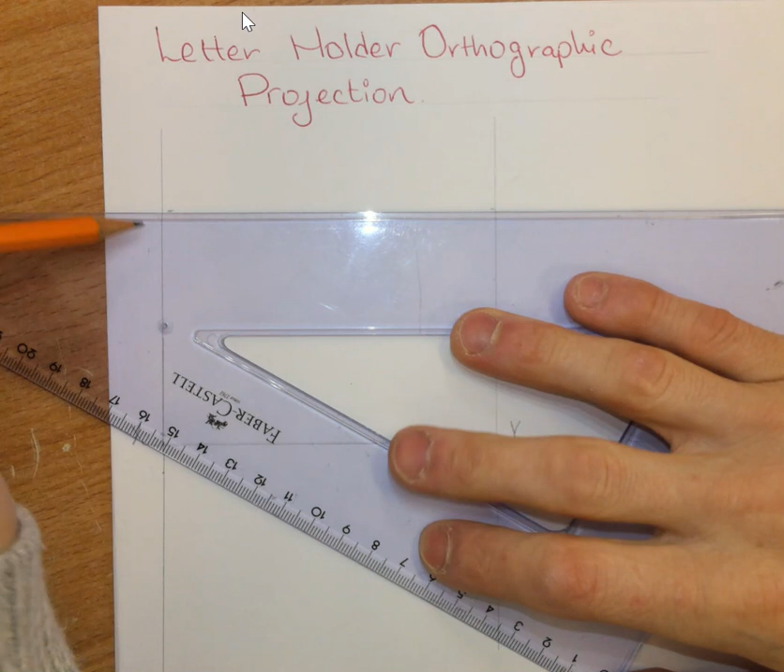Once I've that done, my next step is I'm going to measure up a distance of 70 millimeters. So I'm going to measure from here up to here, 70. And I do the same on the other side. Measure up from 10 to 17. So that's 70 millimeters, and I'm going to draw a horizontal line. While I draw this horizontal line, I'm going to extend it to the right hand side. That will help me to find the height of my end view.

So my next step now is I'm going to draw my plan. So my plan, I'm coming down a distance of 15 millimeters. So from my baseline, which is here, my XY line, I'm coming down 15 millimeters. So this is 10. Okay, so I'm coming down to 9, and then I'm coming down to 5. So in total we have 15. So that's 85, from 100 to 85. I can do the exact same on the left hand side. Put my XY in line with 10, and then measure down to 8.5, which is 85, and I can draw my horizontal line here.

So once I've that done, I'm now going to measure down a distance, which is the width of my view. So my letter holder is going to have an overall width of 45 millimeters. Just going to measure 45, and I'm going to do the exact same thing on the other side. So I'm going to get my ruler, put 0 here, and I'm going to measure down 45. So make sure your 0 is lining up with this line, with 45 there. Join up the 2 points, like that. So this is the outline for my elevation. This is the outline for my plan view.

My next step now is I'm going to draw my end view. So in order to find that outline, if we came down 15 from here to here, we now need to come over 15 from here to here. So this is where my view starts. And then I measure out 15 again from here. And I draw my line nice and lightly, up and down. And I'm now just going to join this line from here to here, and that is my 45-degree line.

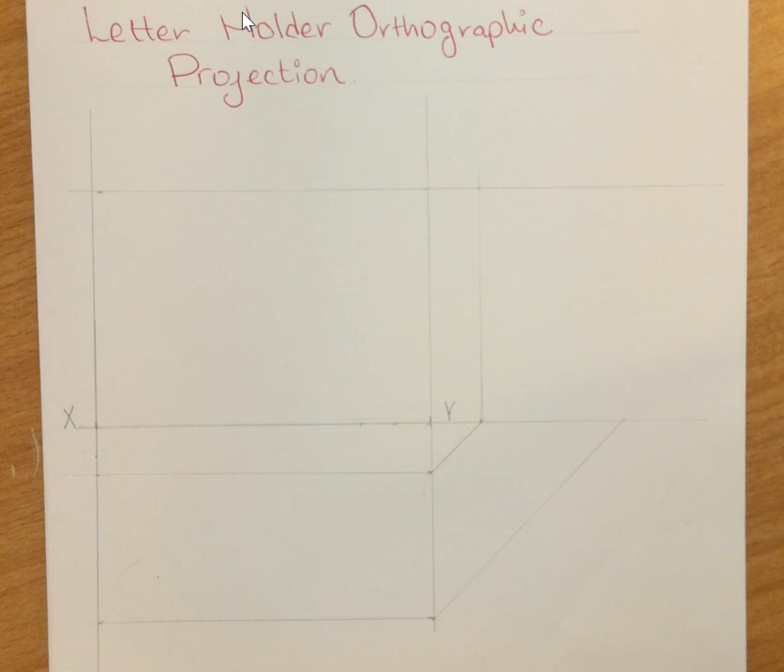My next step is I'm now just going to take my line straight up, so a vertical line. Like that. So that's the outline of my end view.

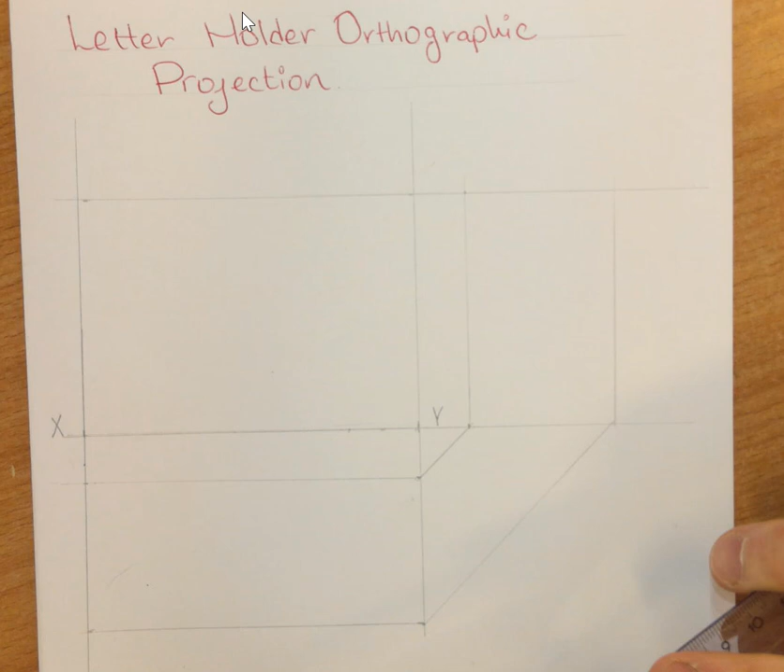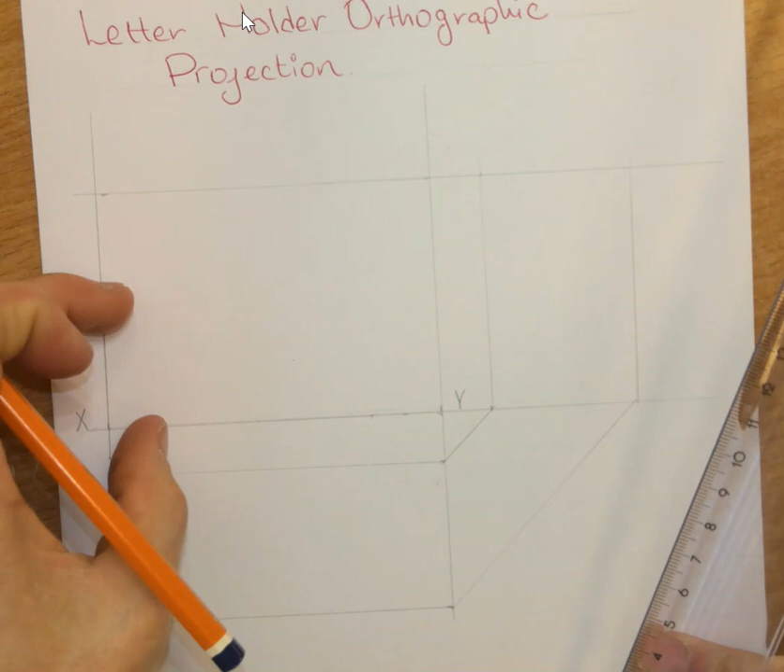So let's start drawing our elevation now. So in order to hold our letters, we're going to have a front piece and we're going to have a back piece. The back piece is going to be curved, the front piece is going to be straight. So the front piece is lower down, so we're just going to, with our rulers, put 0 on the baseline, which is our XY line, and we're now just going to measure up a distance of 30 millimeters.

So we're going to mark it off here, and we're now just going to put 10 here, and I'm going to measure up 30, so that's 100 millimeters, that's 130, and now we can join those 2 points like that.

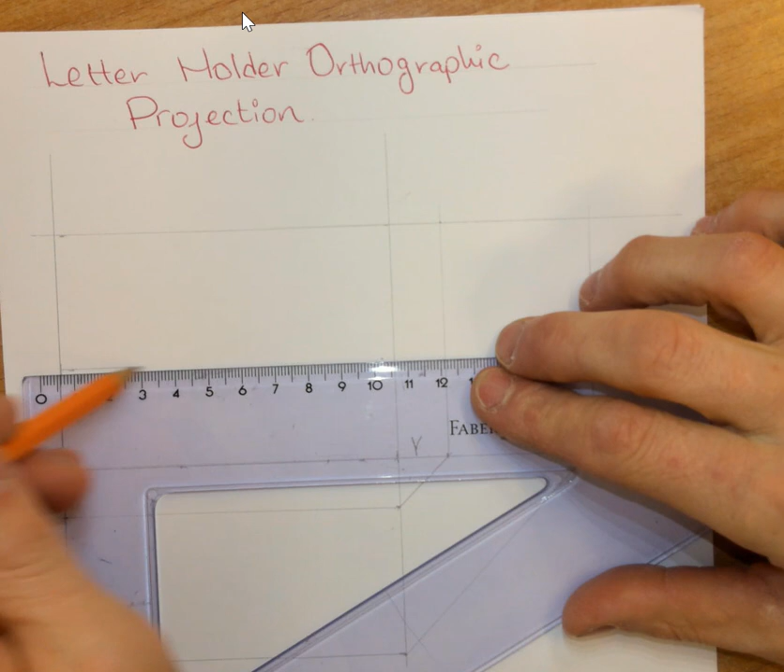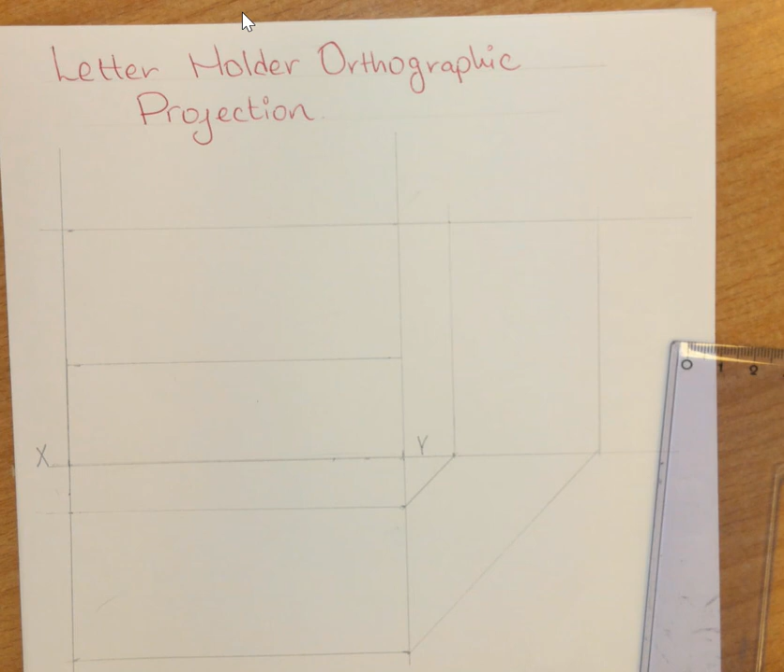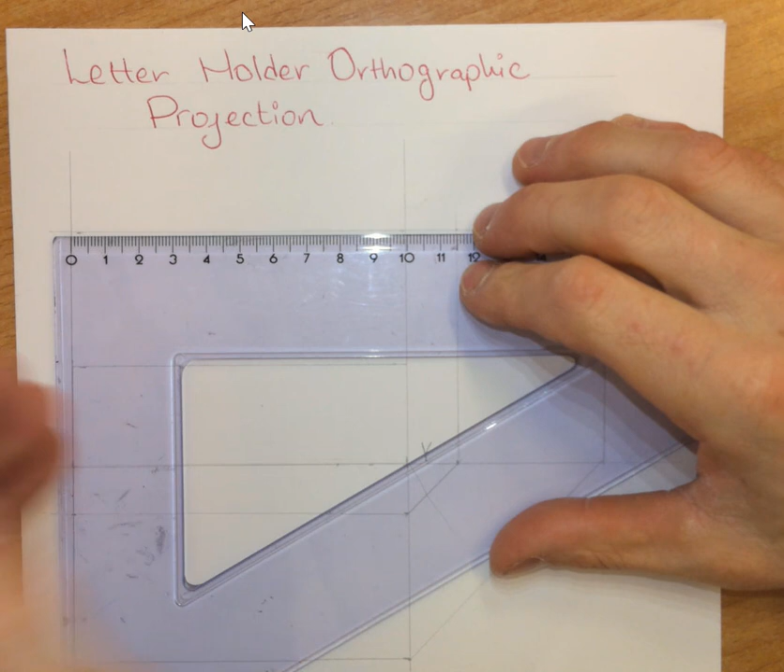Now for the back piece, that's going to be curved. So in order to achieve a curve, the first thing we'll do is we'll find halfway. So the distance from here to here is 100 millimeters, half 100 is 50, so we're just going to mark off 50, which is there.

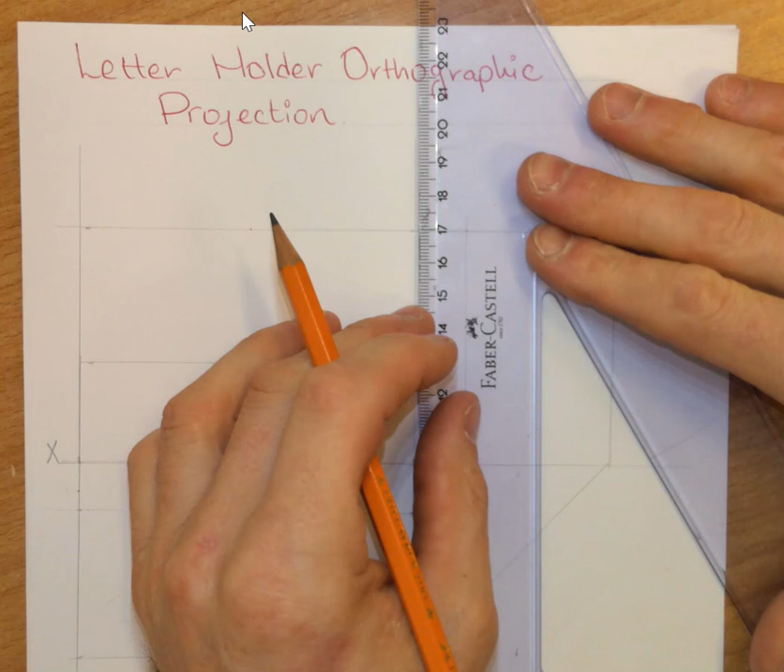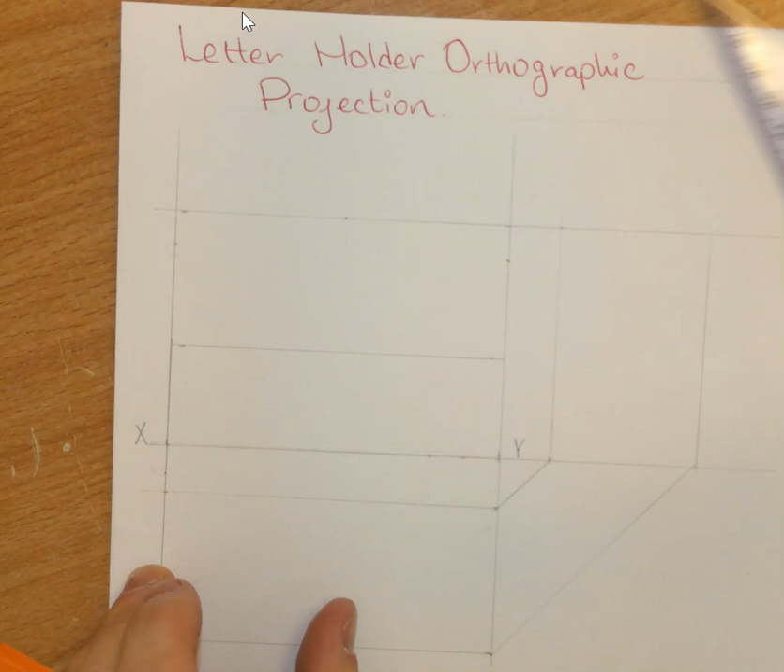My next step now is I'm going to measure down a distance of 10 millimeters on the right, which is there. So I'm just coming down 10 millimeters like that, from this corner down. And I'm now going to measure 10 millimeters down on the left hand side. So now I've marked out my 3 points. My next step is to draw a freehand curve.

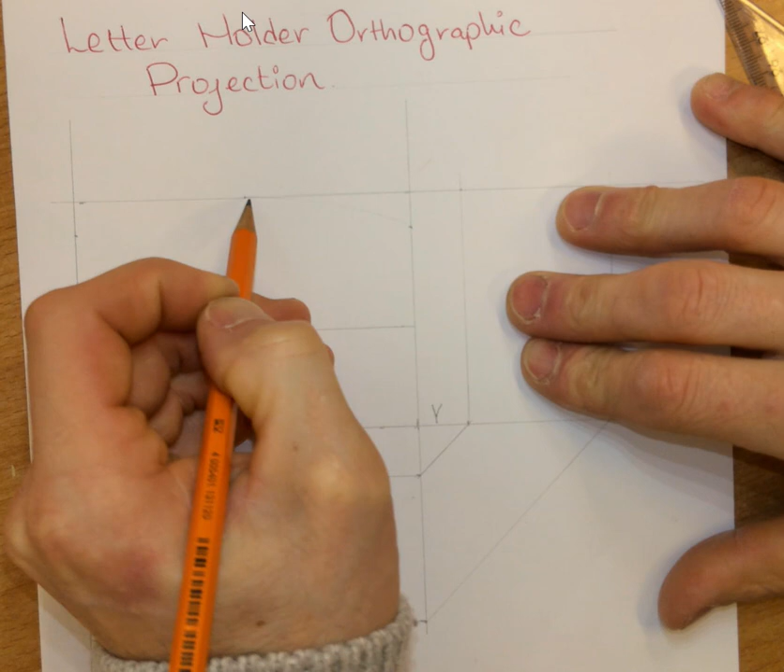And in order to draw my freehand curve, we're going to start at the very middle and we're going to go to the right. So practice it 2 or 3 times before you actually drop your pencil. Drop your pencil nice and lightly, and then we'll go over it heavy. Okay, so that's the right hand curve.

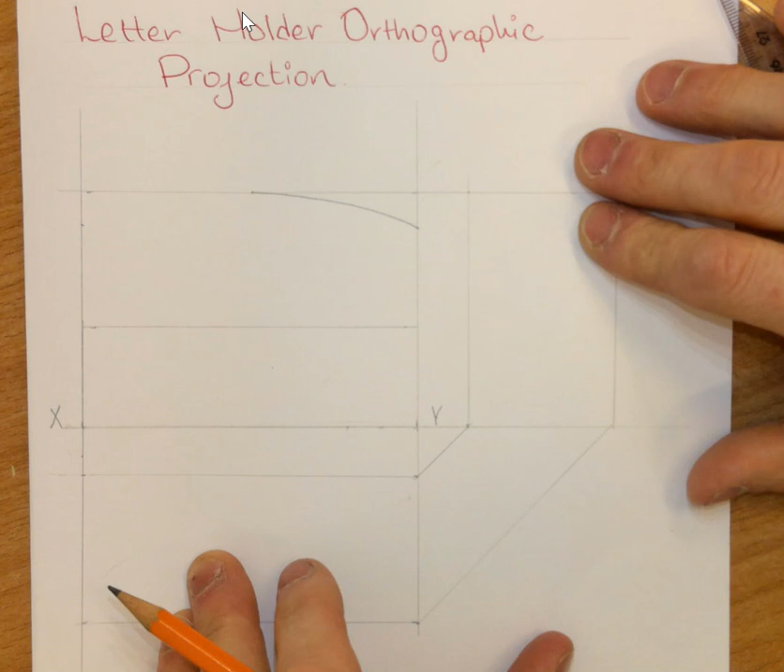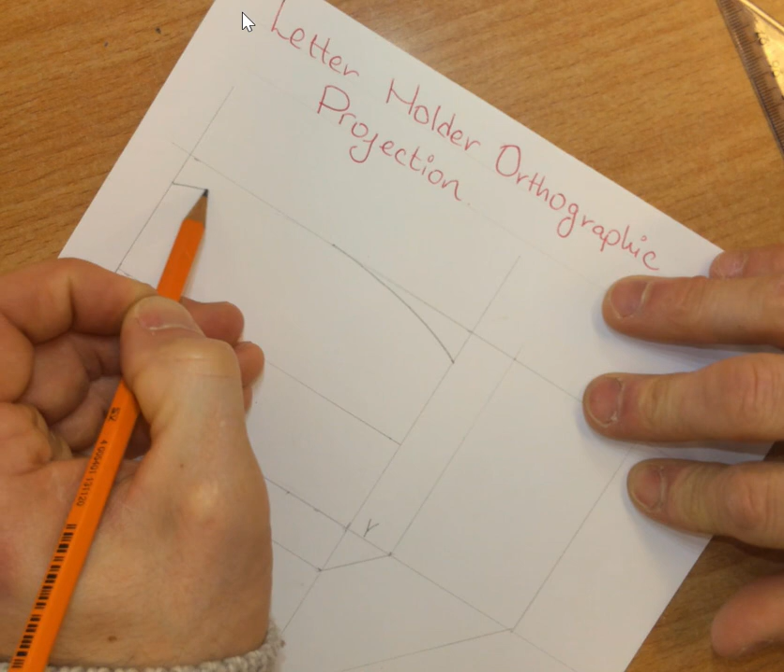Now once I've that done, I'm going to twist my page just to make it easier for myself. So twist your page nicely like that. Again, practice drawing your curve before you draw it. Make sure it's the same as the other one. And drop your pencil nice and lightly. Then we'll draw it heavy. Okay. So that's my freehand curve completed.

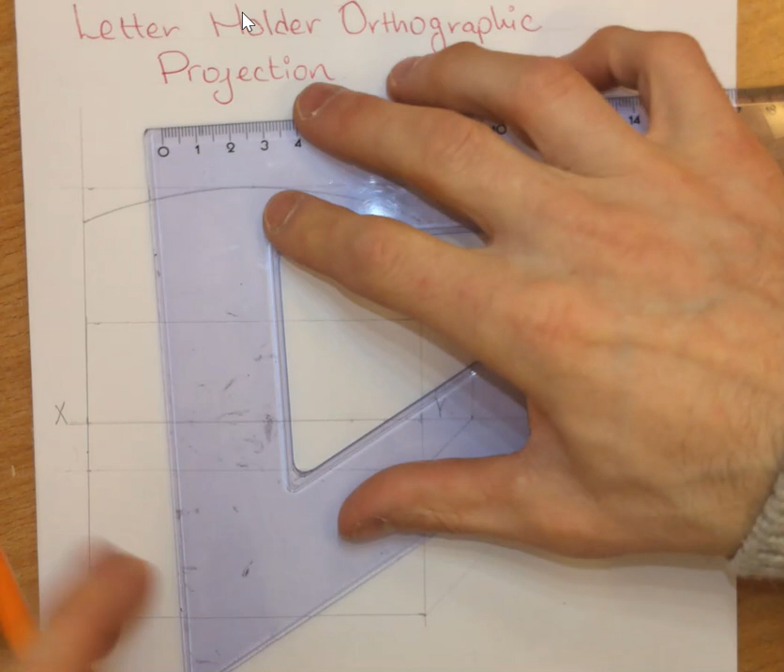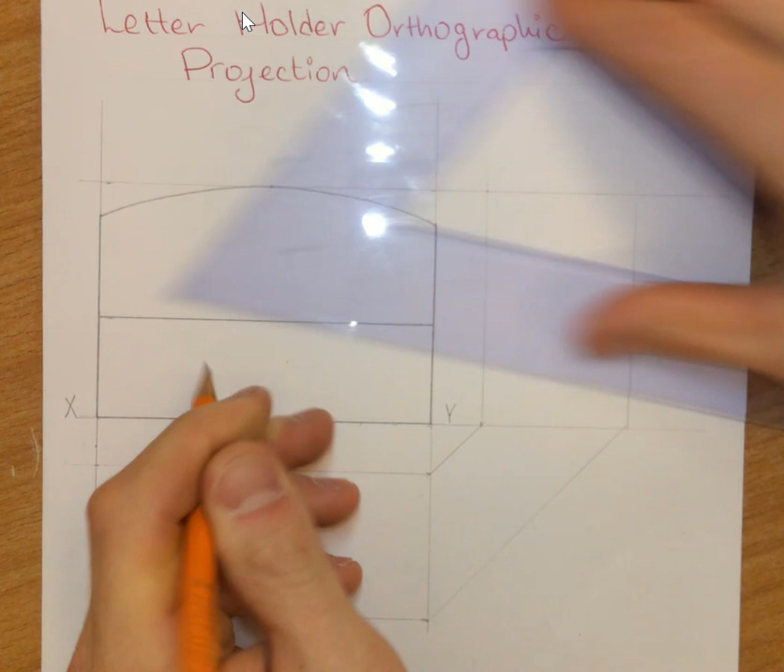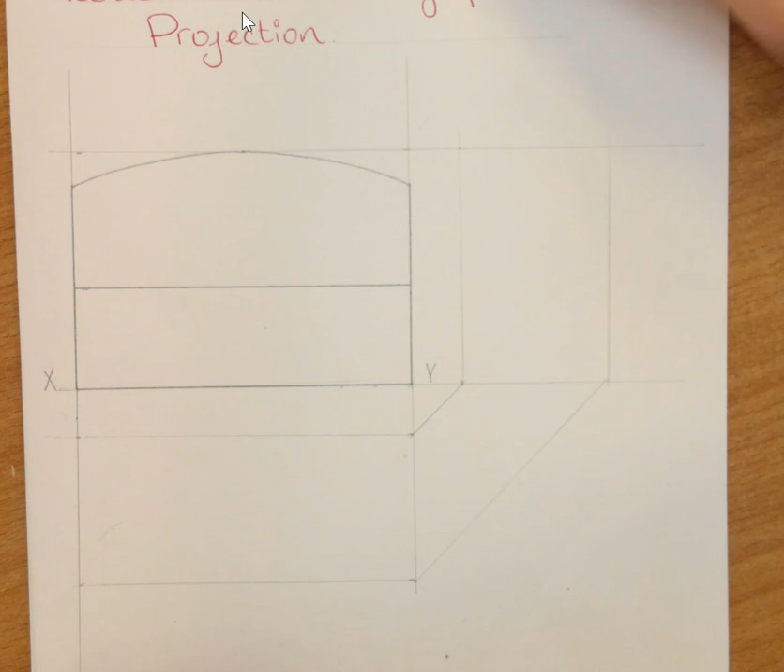Now what we can do is we can go around all our edges heavy, just with a ruler. And again, we're pressing our pencil down just that bit harder. That's my elevation completed. My next step now is to move on to my plan view. Okay, so we're now going to focus on the plan, and I'm going to zoom in on the plan view here now so we can just look at it a bit closer.

Okay, so for my plan view, we're going to go with the thickness of the material on the front and the back. And that thickness we're going to go with, just so it looks in proportion, let's go with 7 millimeters. So from here to here is 5, 6, 7. Okay, so jump 5 and then 2 small little steps after that.

So that's 7 mil at the back. Let's do 7 mil at the front. So 7 millimeters is from 60 up to 65, 66, 67. Make sure your pencil is nice and sharp so that you can actually locate that point. So we have 2 points marked on the right. Let's do the exact same thing on the left.

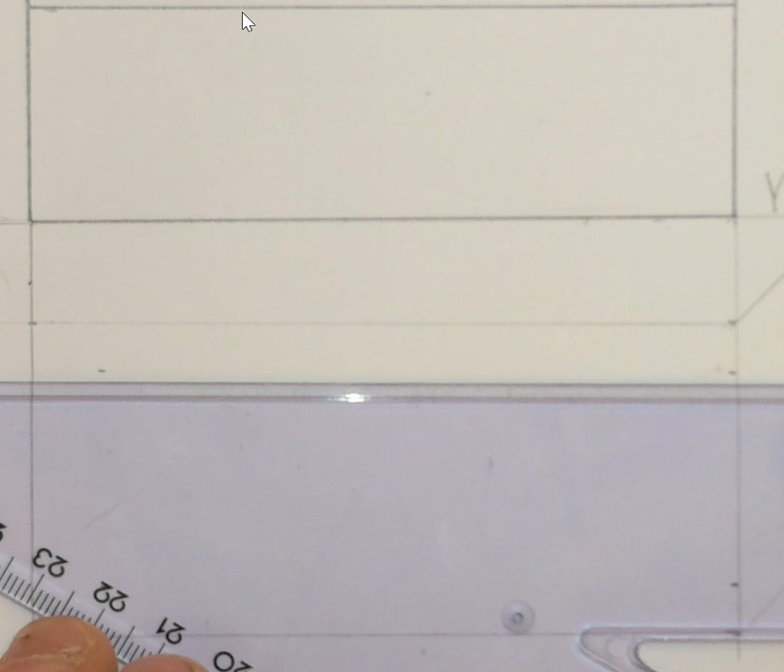So now what I have is 4 points or 4 markings on my plan. Let's now join them up. So draw that line nice and heavy, and we'll do the same at the front. And we can now make this line heavy and the back line heavy.

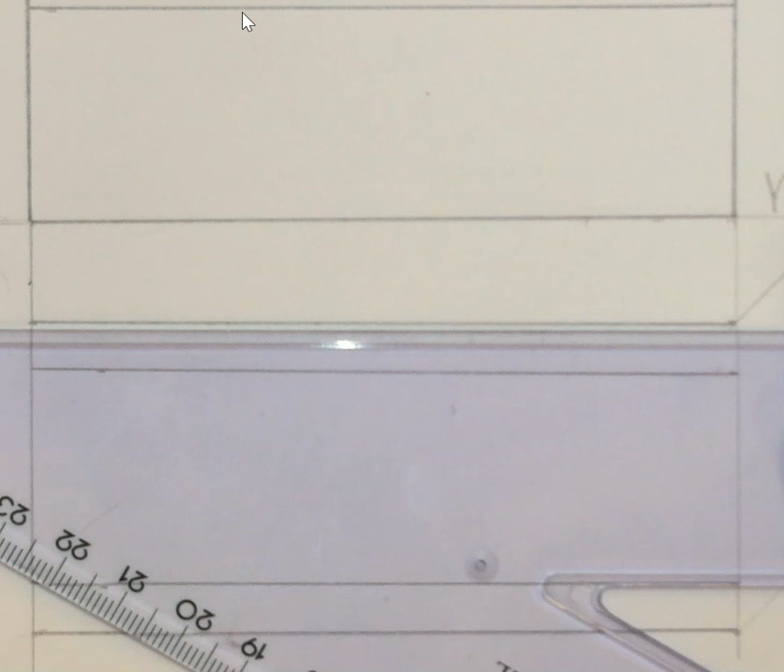So when I look down from the top, that's my front piece and my back piece completed. The 2 pieces will be made of the exact same type of material, so that's why they look the exact same width.

So what we're going to do now is focus on our joints. We have our side material here, where our joints are going to be completed. So in total, let's measure in a distance of 10 millimeters. Okay, 10 millimeters. So from 1 back to 0, we'll just mark that, and again on the other side we'll start at 0 and come over to 1, which is 1 centimeter, the exact same as 10 millimeters.

So once I've that done, I'm now going to draw a vertical line, which is here. So you can see there I'm slightly adjusting it left and right just to get it completely vertical. I'm lining up with this one. Take your time to draw it, and when you're happy, proceed. So that's my vertical line.

Okay, again here, when I put my ruler here, it's quite hard to see if it's vertical or not, so I might just move my ruler and put it around the other side like this. That way I can eye up this line on the right. So put your ruler on your marking. Take your time before you draw it. When you're happy, draw your line.

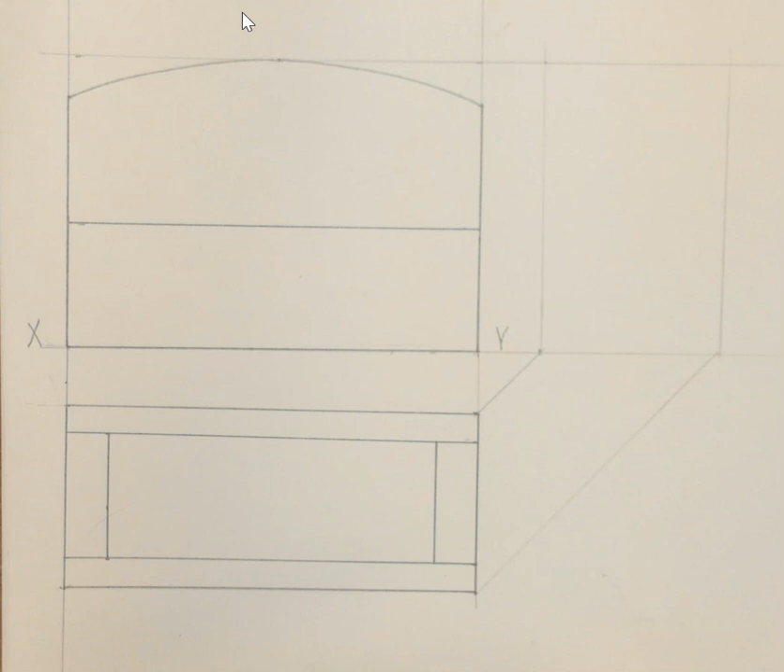So what I'm now going to do is try and bring up the width of my front piece here and my back piece up to my end view. In order to do that, again, I'm just going to use my 45-degree lines. So put my ruler like this at this point, which is here. Try and get the edge of my ruler parallel to this line. Take your time, don't rush it, get it parallel, and draw that lightly up to my end view. So that's that line completed, and we're going to do the exact same for here.

So again, I'm going to get my ruler and put it on this side of the line, just so I can see this line. So line it up here, and draw your line. Take your time, make sure they're parallel. Okay, use your eye.

And now I'm going to focus in on my end view. So I brought up the thickness of the back piece and the thickness of the front piece by these 2 lines. So we'll zoom in on our end view. Just looking at my end view, what I'm now going to do is take up my back piece and my front piece with two vertical lines.

So I'm going to put my pencil here. Take your time when you're drawing this line and extend your line up nice and lightly. Put my pencil here, extend our line up. When we extend our line up, just take it nice and slow, get your line vertical. Here we go.

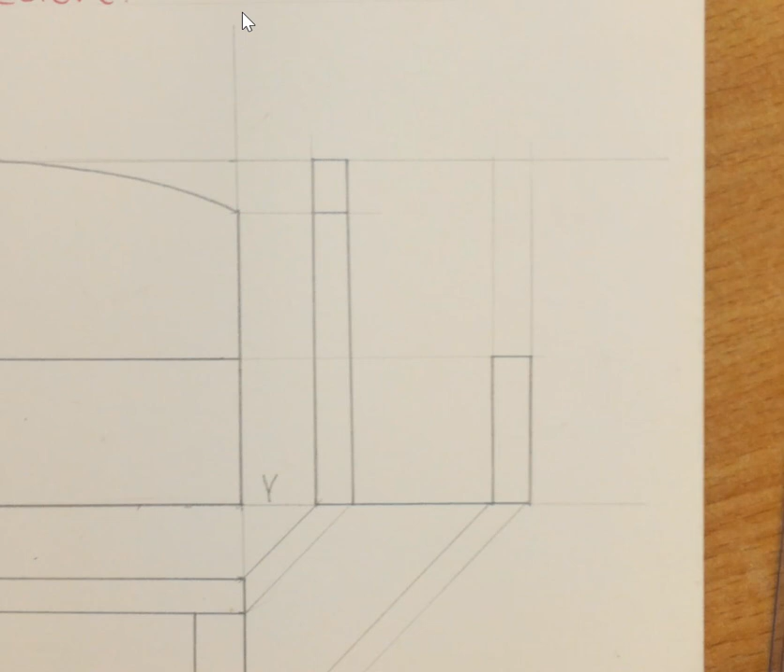Once I have that completed, my next step is to put my ruler at this point, which is here on my elevation, because that marks where the curve ends. And I'm now going to extend a line from here straight across nice and lightly, and we can make that line heavy. This line heavy, and then this line, and the top. So that's my front piece and my back piece.

My next step now is to now put in my wood where my joints are going to be. So in doing that, we're just going to measure down a distance of 10 millimeters from here to here, like that. Just mark out a small little tick, and I'll zoom in.

So measure down 10, so 180 down to 170. Or even 130 down to 120. That's 10 millimeters, and we're going to join it from here to here like that.

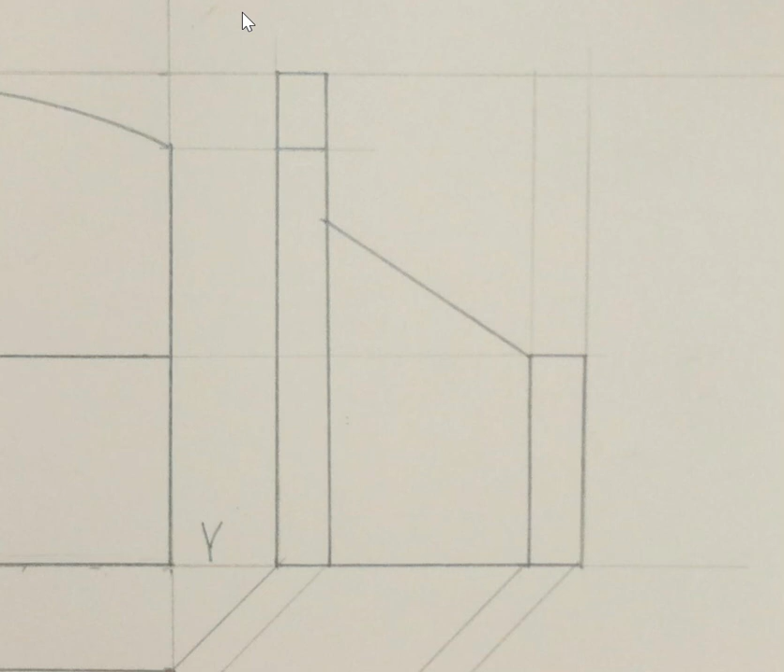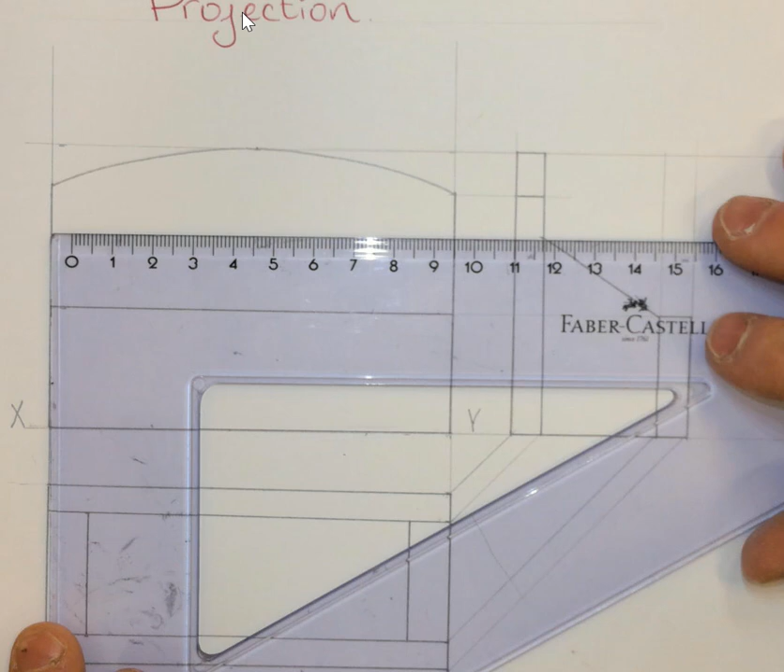Once I've that done, I'm now going to take this point from here straight across to my elevation. So we get our ruler. We place it down, line it up with this point, which is here. Take your time in drawing this line. In order to help you to draw this line, what you could do is you could line the left hand side of the ruler, which is your vertical edge, up with your vertical lines that you've just drawn, while also matching up with this point.

So I don't need any T-square here, I'm just using one set square, and I'm using the 90-degree edges on the set square. So very simply, catch your pencil, pull that line straight across nice and lightly. We can stop it, and we can extend our ruler and continue. So that line is very important, that light line that I just drew.

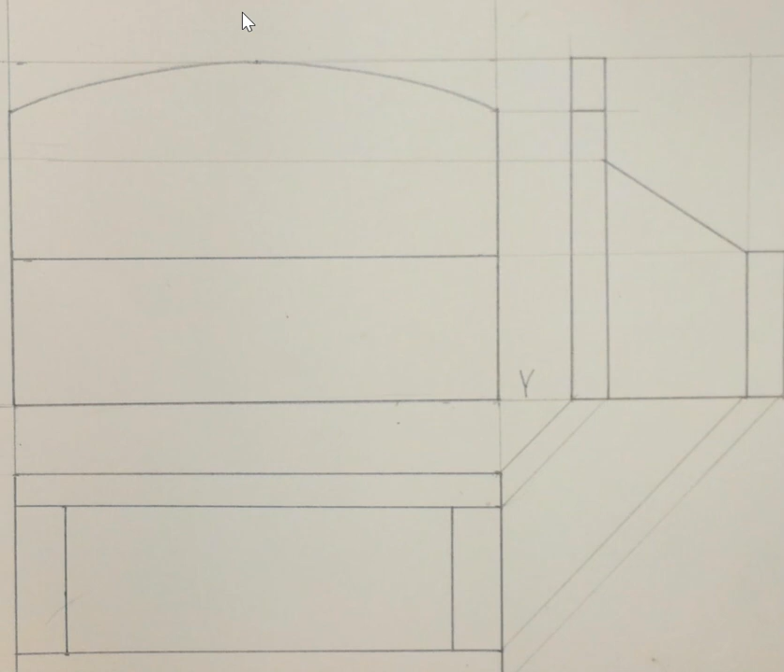So the reason why we drew this line across is to find the height of our two side pieces, which are going to be here and here. And I'm now going to find those by extending this line, which I have here, straight up. Now we do know that this distance is 10 millimeters, so we can, if we want, come over a distance of 10, like this, mark it on that line, and join that point up to this line, and this now will be a heavy line from here to here.

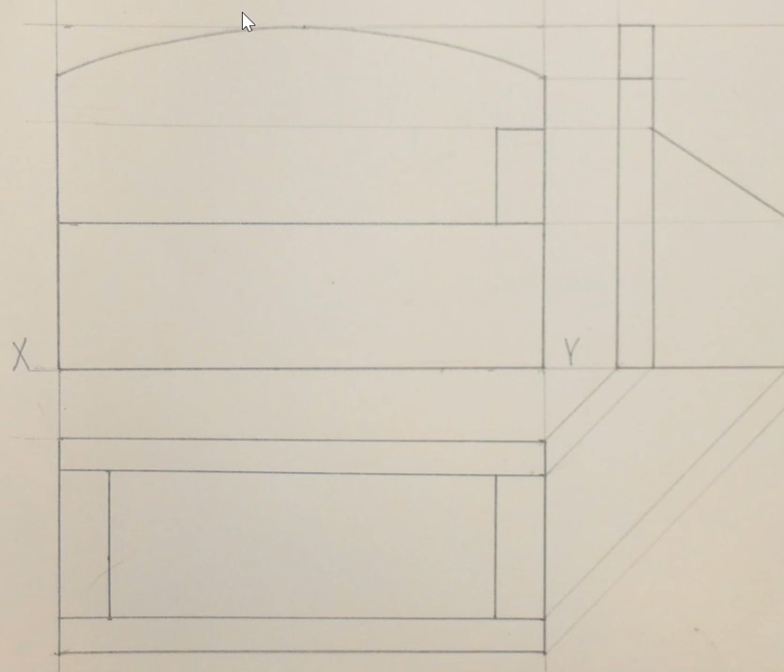We can draw this line heavy also, like that. So once we've done that on the right, let's do that on the left. So we now put our 0 here, and we mark 10 millimeters, and we then join this line up with this point, like that.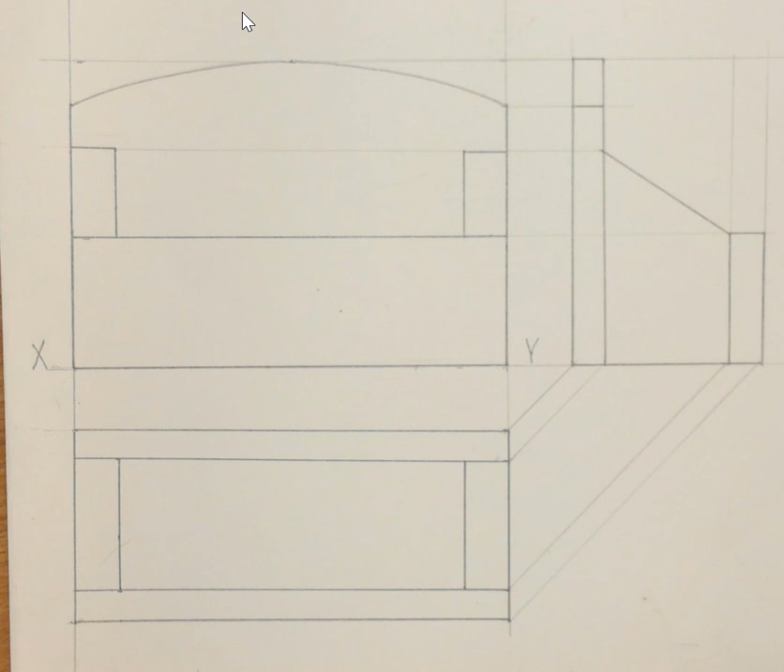So my next step is to now draw the bottom piece of wood, and this will be seen on my end view. So I'm going to come up a distance of 10 millimeters, which is here, like that. So we're going to go from 160 to 170. Okay, I'll zoom in on that for you.

So again, up 10 millimeters, and I'm now going to draw a horizontal line. So put your ruler like that. Eye up your baseline. Make sure your ruler is straight with it, and draw your line.

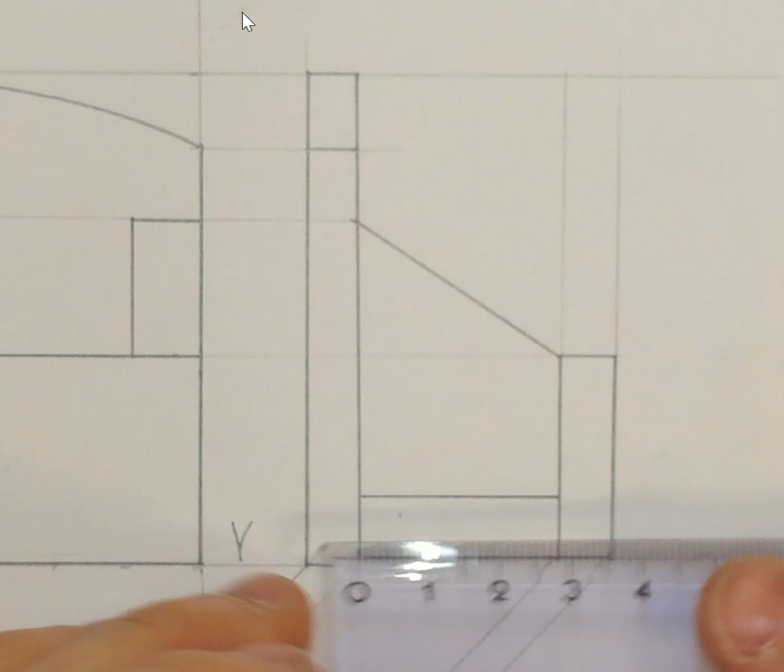So now what we're going to do is we're now going to put in our joint. So the joint that we're going to use here is a finger joint. So what we're going to do here, very simply, is we're simply just going to find the middle of the joint. So this is roughly what, 20 should be kind of 30 wide. So just mark 15, which is here, like that. That's the halfway. Put a dot just on that point.

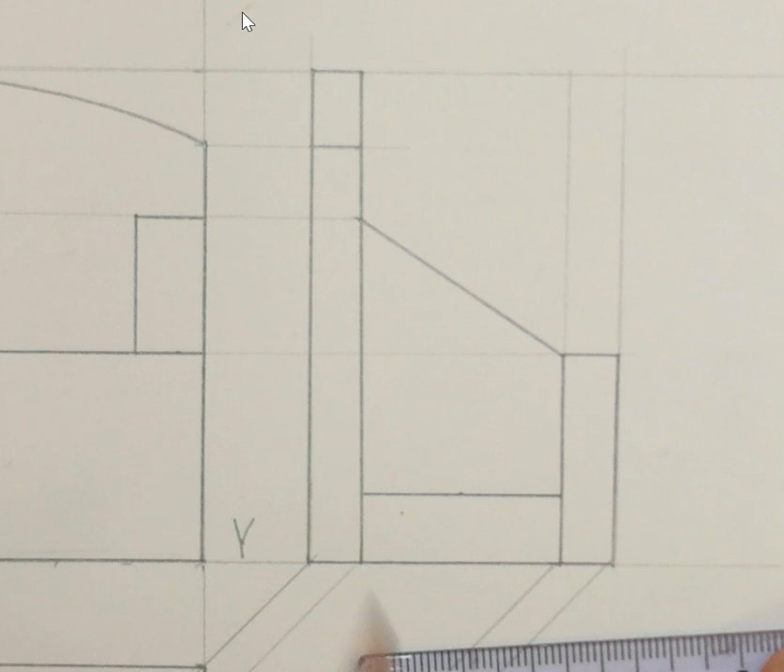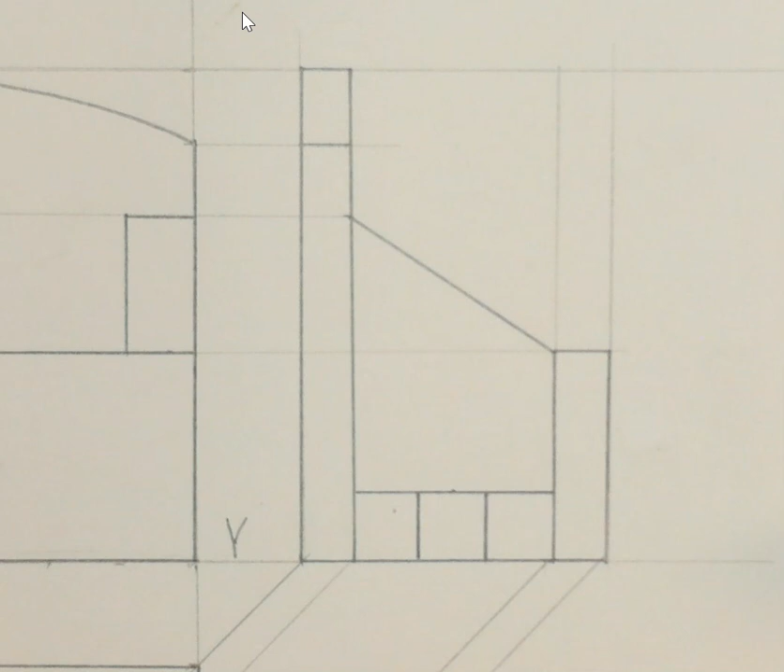And we're now going to measure 5 to the left and 5 to the right, like that. Once we've that done, we're going to draw a vertical line straight down, like that. That's heavy, and then this line is heavy. So I made a mistake when I was drawing this line across. I should have drawn it lightly. The reason why I should have drawn it lightly is because I need to now rub this out, but that's okay. That looks fine there. Okay.

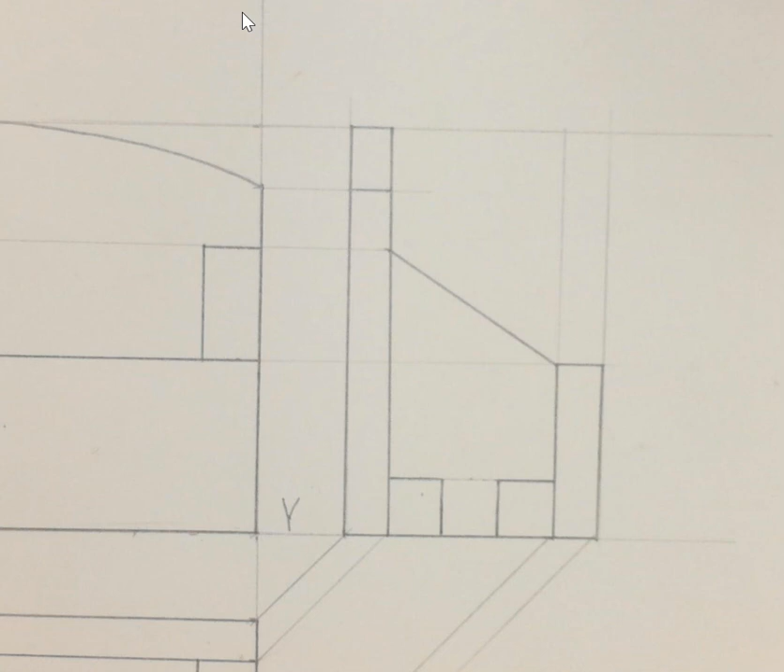So whenever we're drawing an orthographic drawing, you also need to include hidden detail. And the hidden detail reveals any components that you can't see when you're looking at the elevation, or even when you're looking at the plan.

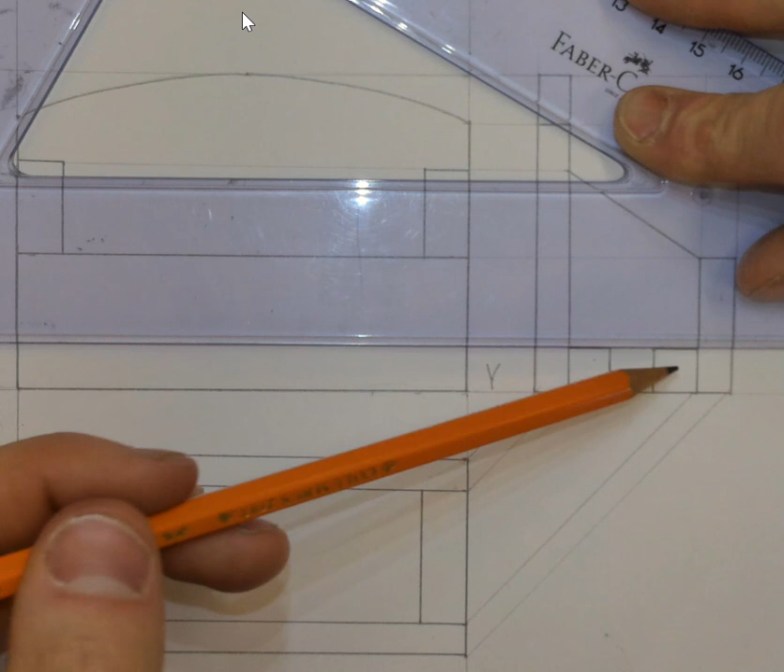So in order to draw the base piece of this letter holder, we're simply just going to extend this line across like this. Now I'm going to put the ruler on top because it allows me to see this line. It's closer to the edge and allows me to get a better viewing and a more accurate line. So we're now going to draw this line, but when we're drawing this line, it's very important to draw it lightly. So I'm barely pressing my pencil. You can see the way I'm holding my pencil from the back. That's a nice light line.

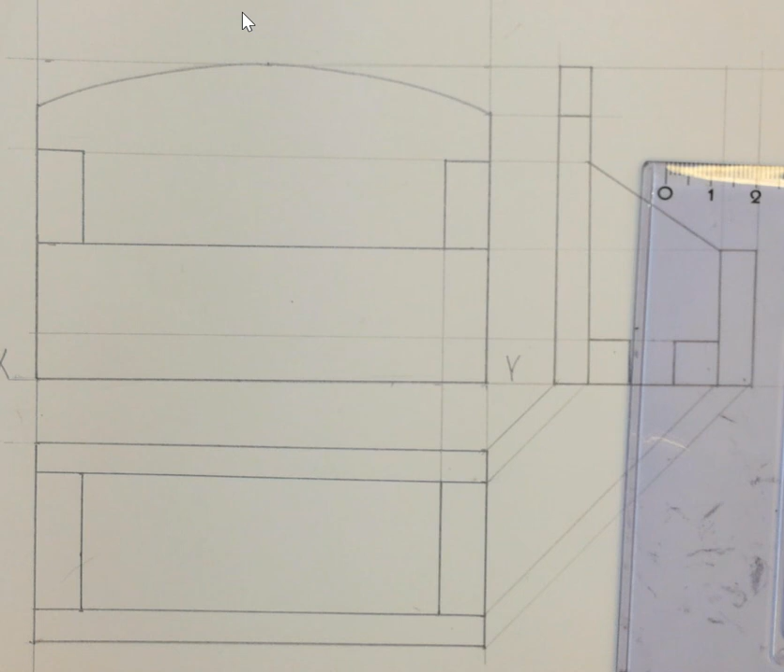Our next step now, what we need to do is we now need to connect our plan and our elevation, like I'm just after doing here. And we're going to draw a light line going down like that. And the exact same over on the left hand side. Okay, so nice and slowly. Line this point up with this point up here, and there's your light lines. When we draw those lines, they will help us to find our hidden detail lines. So we can now draw a broken line from here to here.

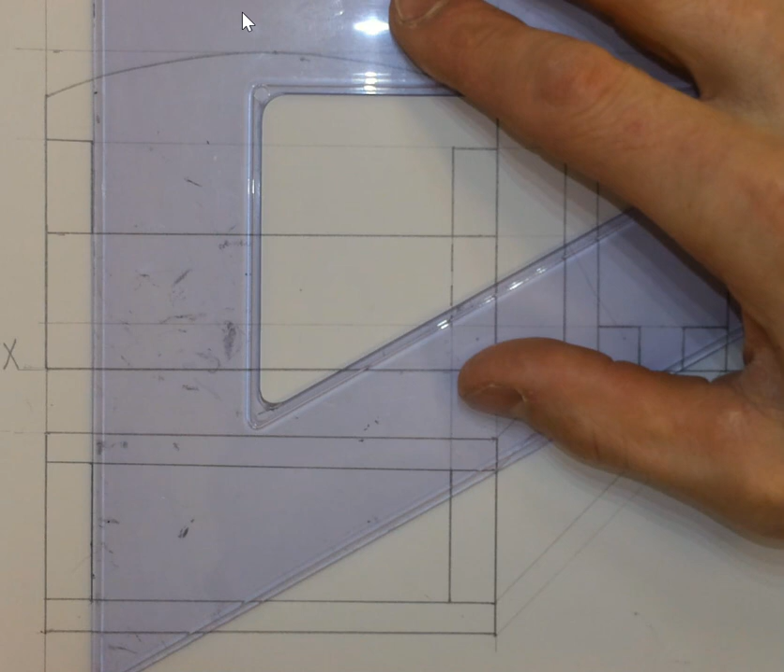Like that. So that's showing the inside pieces, which will go all the way down and all the way down. And now what we'll do is we'll draw our line across. Again, broken. Like that.

Our next step now, we're nearly finished this drawing, is we want to show our joints. So we can see our finger joint here, no problem, but we need to also see it in plan. So in order to see it in plan, we're going to bring this point down the way instead, and this point also down. Okay, so we're going to get our ruler, draw a parallel line

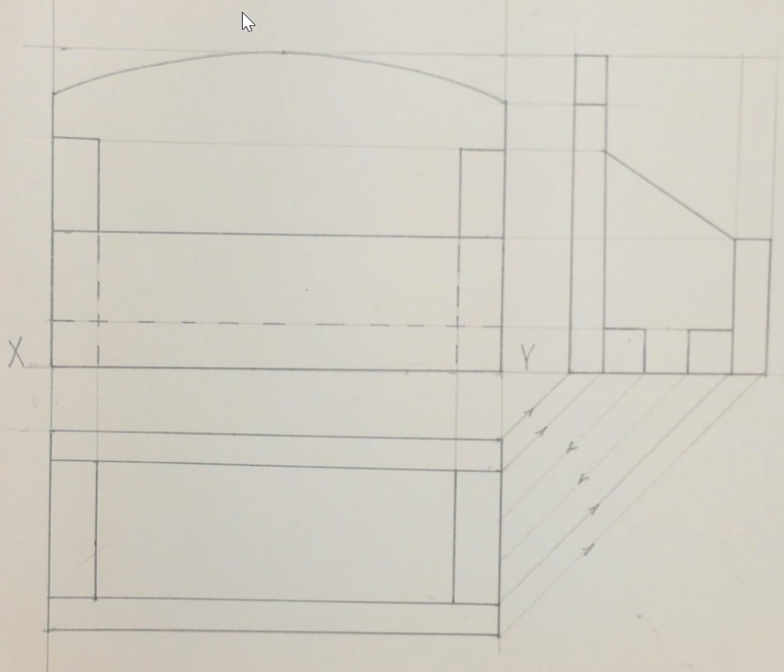down like this, and again from this point draw a parallel line down like this, so we're bringing those two lines back. Just going to do a tiny little arrow there, tiny little arrow up here, and once we've that done, I'm now going to zoom in on my plan view.

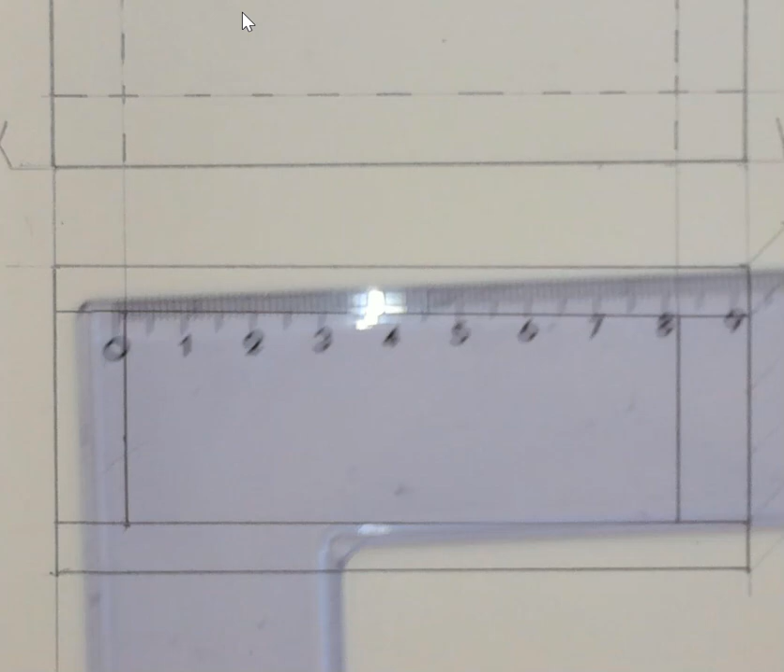So I'm now going to take this line straight across all the way, and this line straight across all the way, and by doing that it will help me to locate the hidden detail in plan for my finger joint. So again, I'm just lining up the left hand of the ruler, that right angle, that 90-degree angle with that vertical line, while also lining up with this line, and I'm going to draw my line across nice and lightly. I'm going to bring my line down, do the same thing again.

Take that across, and we can extend those lines. So those lines that are drawn over lightly, we can now draw a broken line here, a broken line here, and the exact same on the left hand side.

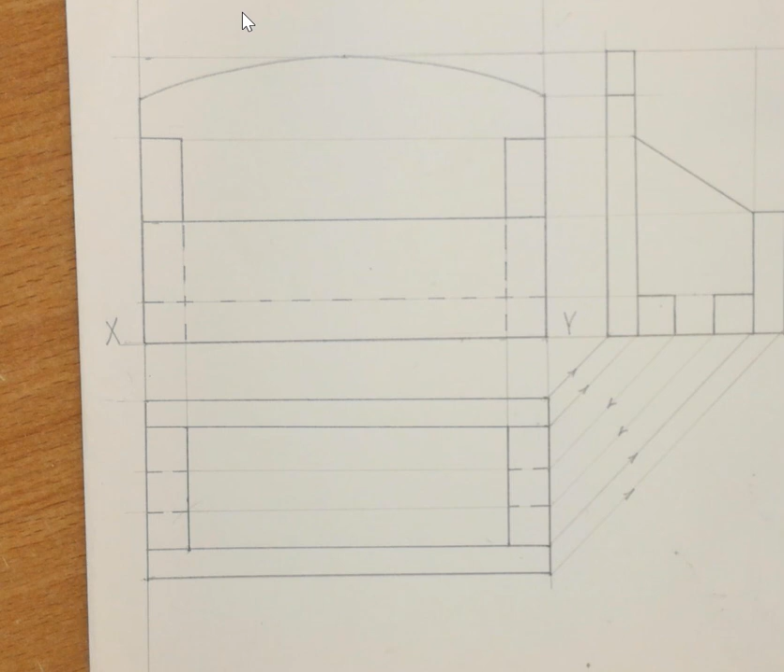Our last step is to now label our views, and that's this drawing completed. So in order to do that, if I zoom in here, at the start we came down 15 millimeters, and the reason why we came down 15 millimeters is because that will give us three 5s. So if I just get my ruler and I put it here, on the left hand side, I've got 5, 5 and 5. So just going to mark 2 little ticks there, one 5, our second 5, and our remaining 5.

Our next step is we're now going to do the exact same thing on the right hand side. Come over, up 5, small little tick, and again up 5, like that. So I'm now going to get my ruler, zoom out first, join up those 2 points, this point and this point, and I'm going to draw a line very, very lightly. So hold the back of your pencil, and we're just going to draw that line lightly.

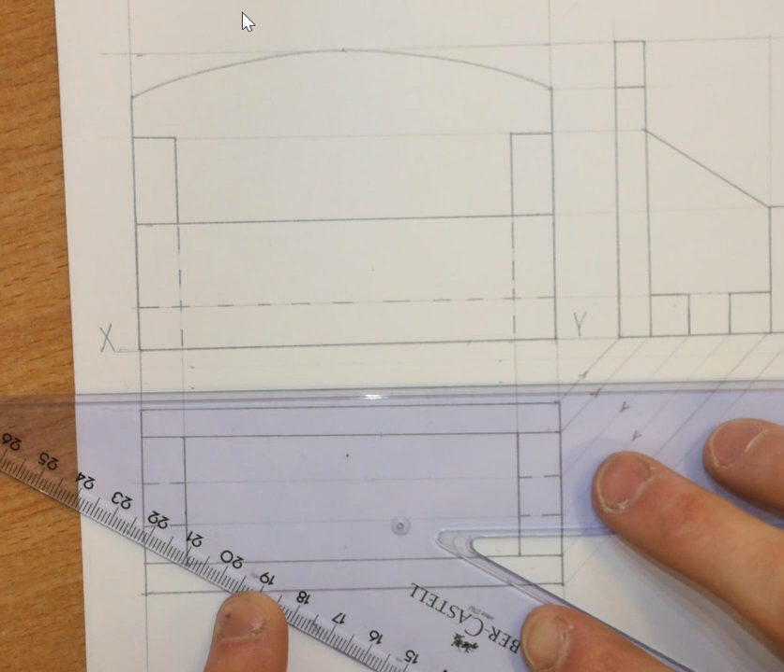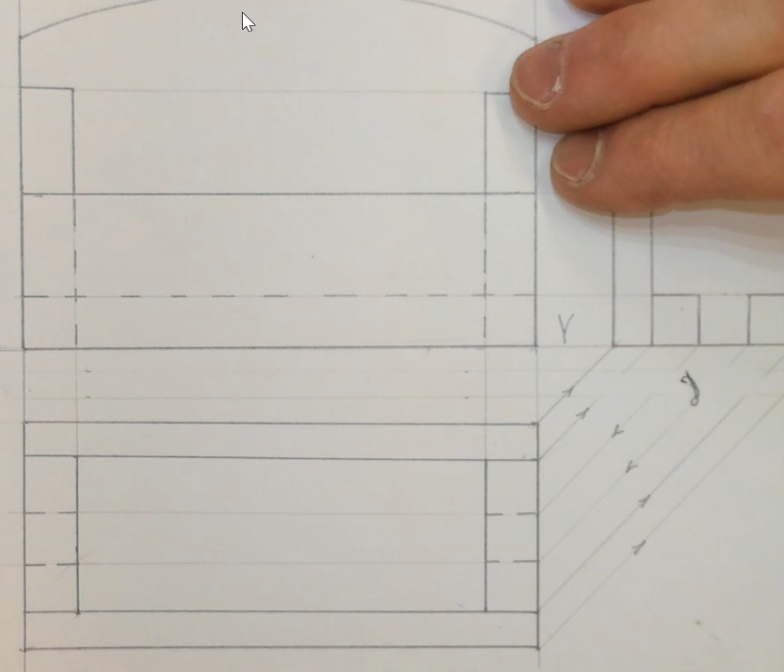Again, line up my other 2 points at the bottom. We're going to draw another line going across, and we now have our labelling lines for our elevation and for our end view. So just before I write my elevation in, I'm just going to rub out them lines because they seem to be in the way. That's perfect. And let's write our elevation.

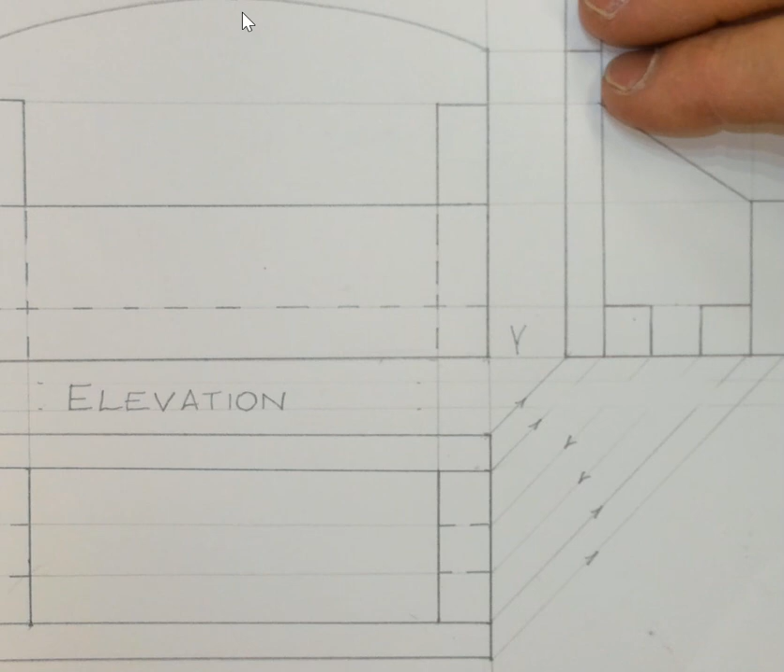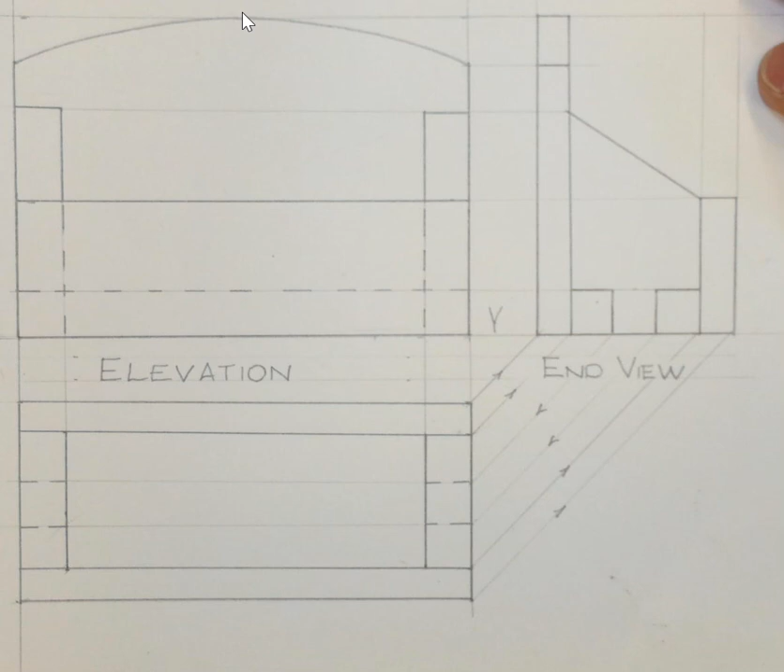So that's my 2 labellings completed, elevation and end view. We're going to do the exact same thing now for our plan view. So in order to do that, I'll zoom in. So we're just going to come down 5 and 5. So just get a ruler, put it to the left hand side, come down 5 millimeters and another 5, mark 2 little dots. Do the exact same thing on the right hand side, come down 5 and come down 5.

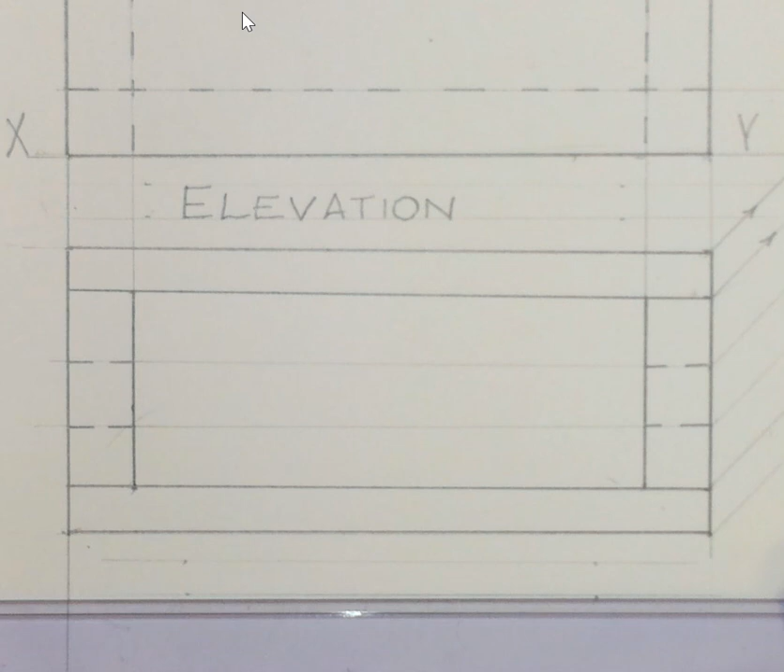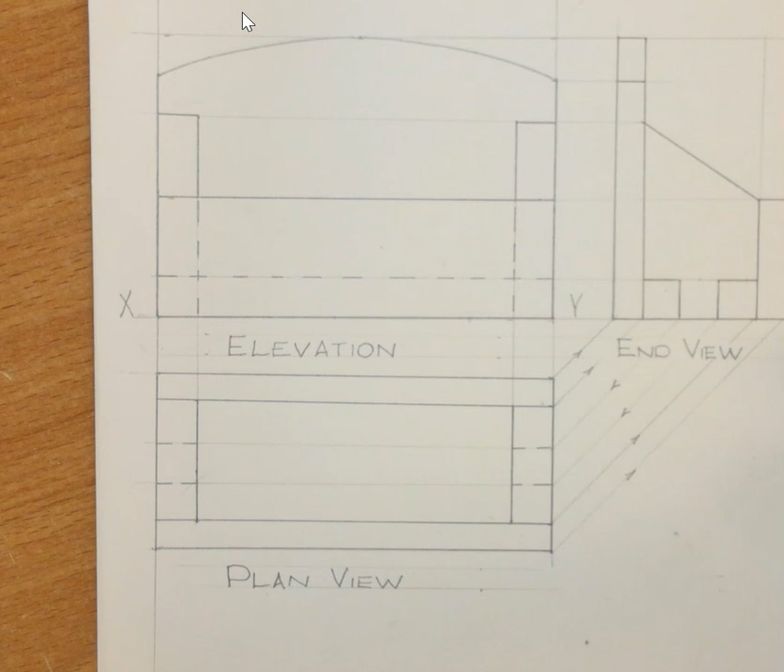So 2 light lines, and we'll now label it. Plan view. And I'll zoom out. So in future, if you're ever designing any project, you will always need to complete an orthographic projection of that project, whatever it is.